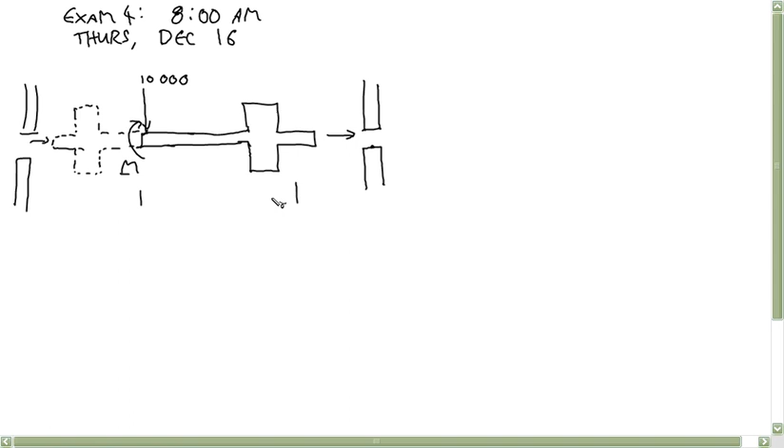So I suppose maybe I should have, do you happen to remember what this force magnitude is? Okay, so 10,000. Oh, and I didn't give a length. I guess that was so whatever this length is, make m equal to 10,000 L, and then you don't have to worry about that rotation.

But it's the same thing as this happening in two places, and there being a 10,000 Newton force split between the two of them. So what you have here is you have this force, you also have this force, right?

The force being applied axially is causing end-bearing friction. This collar here presses up against this wall, okay? And so you have to deal with that collar bearing, that end bearing pressure. And then this 10,000 Newton force causes just regular radial friction, like journal bearing friction between this point and this point. So you're just dealing with the two of those at once.

So that's all this question is, and once you follow what's going on, once you can make sense out of the geometry, it's not much calculating. It's just making sense out of what's happening that takes a little time, I think. Any other questions about that? Okay.

All right, so let's say that we have, and I suppose the most realistic applications might be the static friction questions about this, like when is motion going to start when you have this friction applied? You know, that kind of thing. Like, what's the maximum moment you can apply before this thing starts to turn? Because you don't want these things turning, you know.

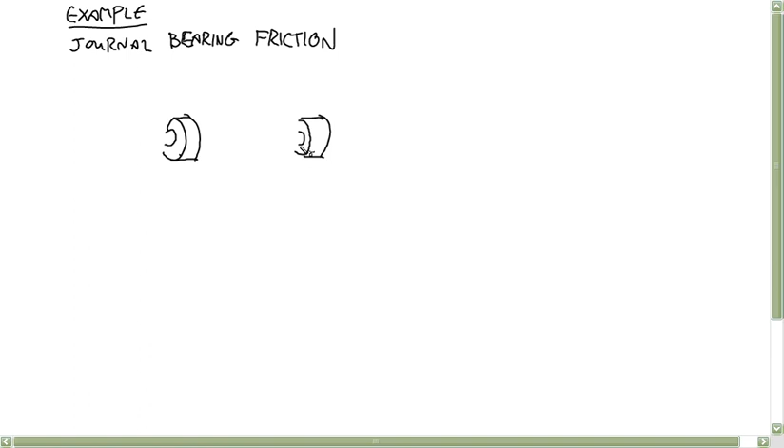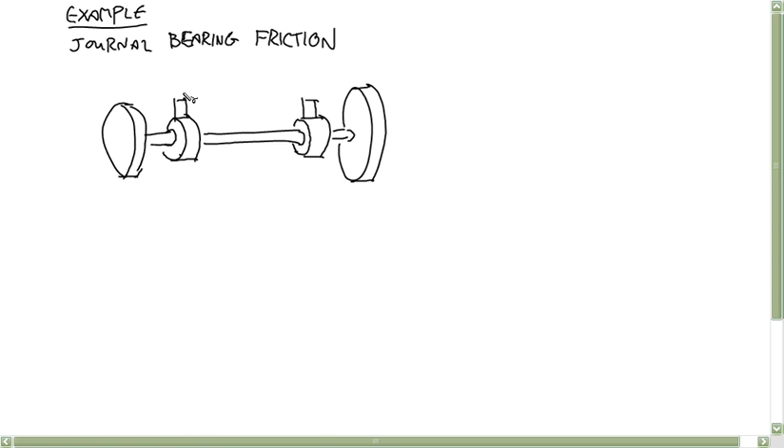Okay, so here are your two bearings. And they're connected to wheels. The axle's connected to wheels. And these two bearings are loaded 5,000 newtons each. So that represents, you know, the weight coming down from a vehicle or something.

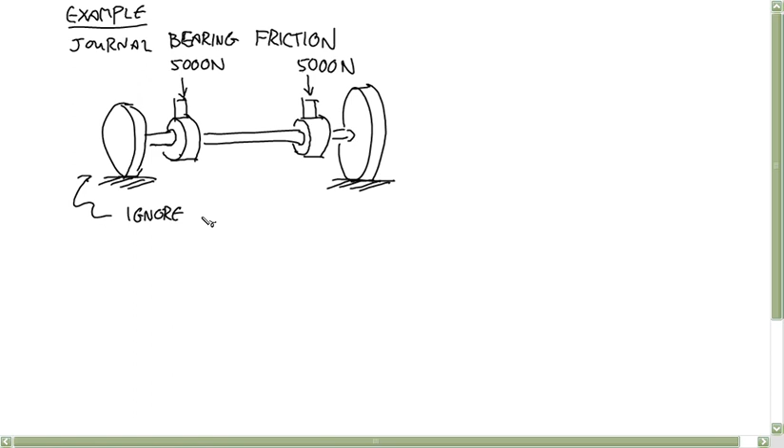We're going to ignore the rolling resistance, we haven't talked about that. But there's friction, there's also resistance acting between the ground and the wheel. How do you know that exists? Because if you remove the axle and just roll this wheel along a flat surface, it doesn't roll forever. So even in a vacuum, it doesn't roll forever, meaning there's friction between the wheel and the ground too, but we're not concerned with that here.

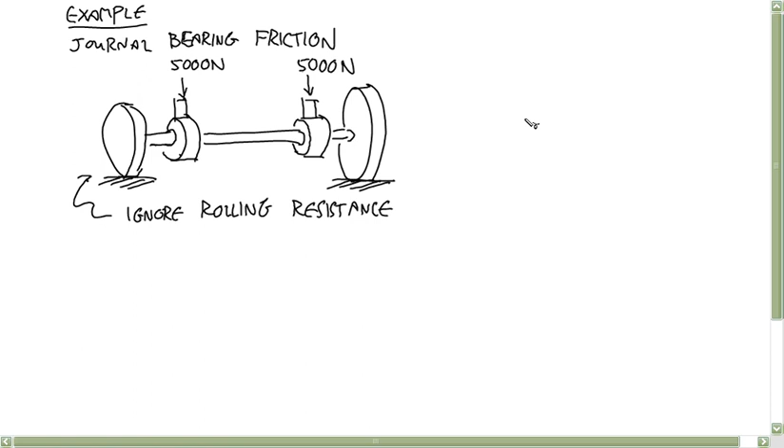The coefficient of kinetic friction is 0.2, and the radius of the axle is 5 centimeters. We want to determine the torque that has to be applied to the axle. In this case, the axle is connected to the wheels, so this torque can be applied to any part of that solid thing, to keep the axle rotating with a constant angular velocity.

We'll start with a free body diagram of the axle. What loads are acting on the axle? There's a 5,000 Newton force coming down, and there's this moment that we're trying to calculate. I didn't specify a direction, so let's give this a positive orientation, and the sign will come out for itself.

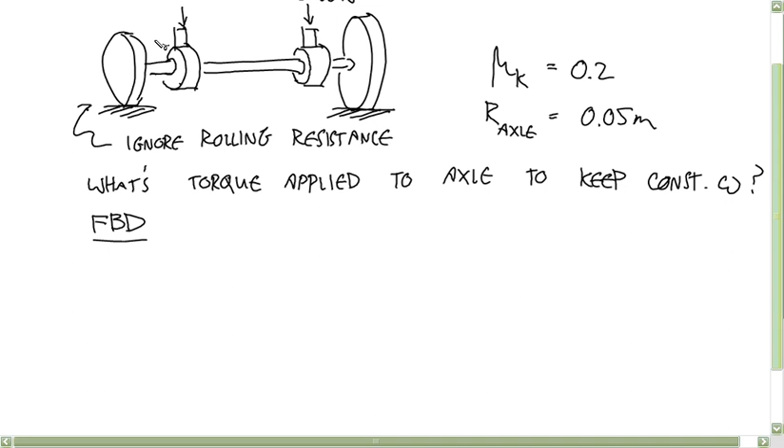You know what's funny about this? This one's actually a little bit different. In order for this to balance, we have a normal force coming up from the ground, right, and that's connected to the axle. So really here we have our force of 5,000 newtons acting this way.

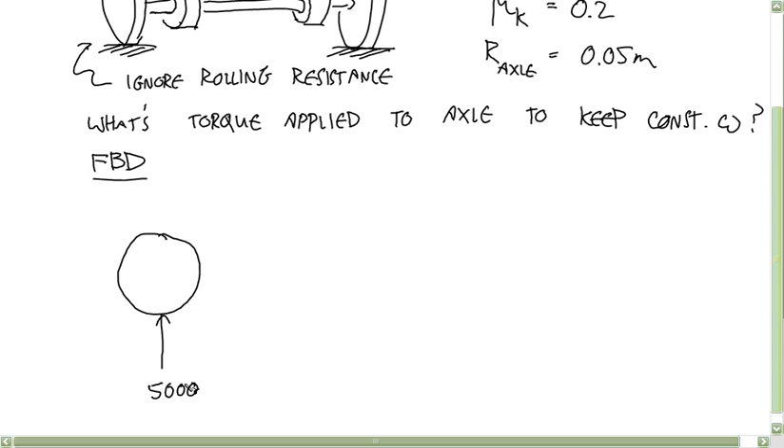We know there's going to be this external torque M applied to keep this rotating. The only other thing applying a load to this axle is the bearing, which means it has to balance that 5,000 Newton force if this is going to be rolling along a horizontal surface. Since that's the only other load applied, it can't act right through the center, or this moment would have nothing balancing it. So the 5,000 Newton force acting from the axle has to be offset — if this external moment is making it counterclockwise, this force has to be offset this way to counteract it.

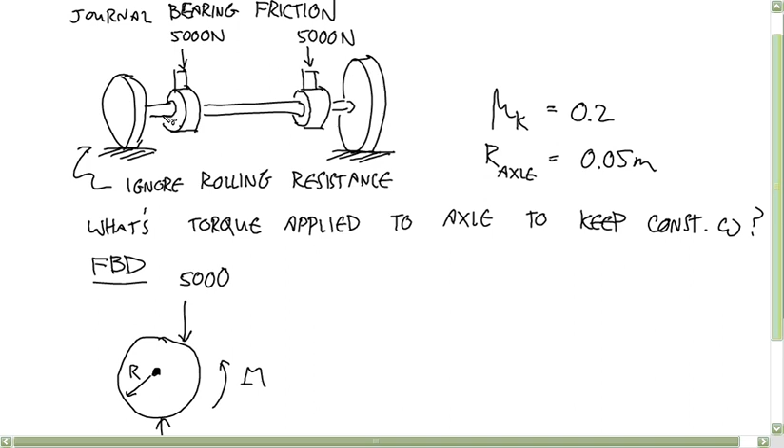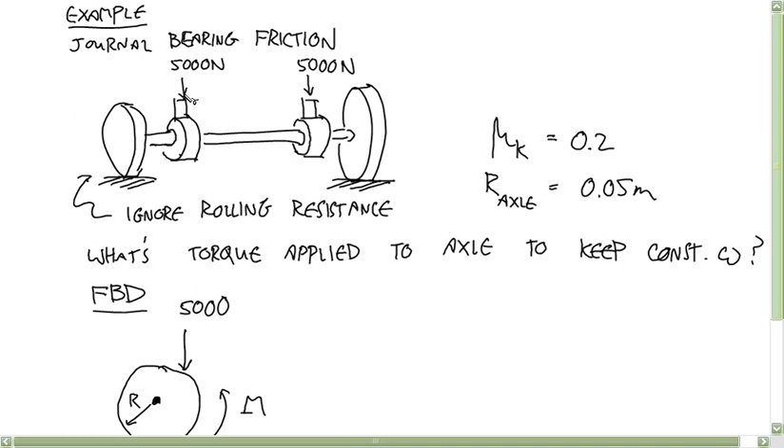Who's with me on why I turned this upside down? The force that's directly applied to the axle is coming from the wheels — the wheels and the axle are all one piece. So there's this upward 5,000 Newton force applied from the ground to the wheel, through the metal, next to it, until we get to our cross section, and then we have this upward force of 5,000 newtons. The bearing is what's pushing down in this case. And if the moment is acting this way, the external moment, that means this is the direction of rotation.

This 5,000 Newton force acting down, produced by the bearing, can be broken up into a normal force and a friction force. The normal force is this. The friction force has to counteract the direction of motion, so there's the friction force. And this friction force has to be equal to 0.2 times the normal force.

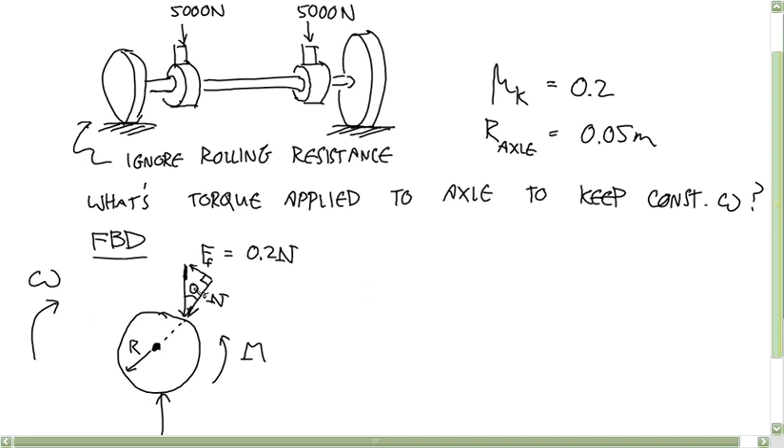Now we can use this relationship to figure out what this angle is. If this is the angle, the tangent of that angle is equal to opposite over adjacent, 0.2n over n, so 0.2. So if we make a triangle with the opposite side 0.2 and the adjacent side 1, then the length of the hypotenuse is the square root of 1 squared plus 0.2 squared, so square root of 1.04, which gives you about 1.02.

We could also calculate that angle, but there's no need to here. So once we have this triangle, what are we trying to calculate?

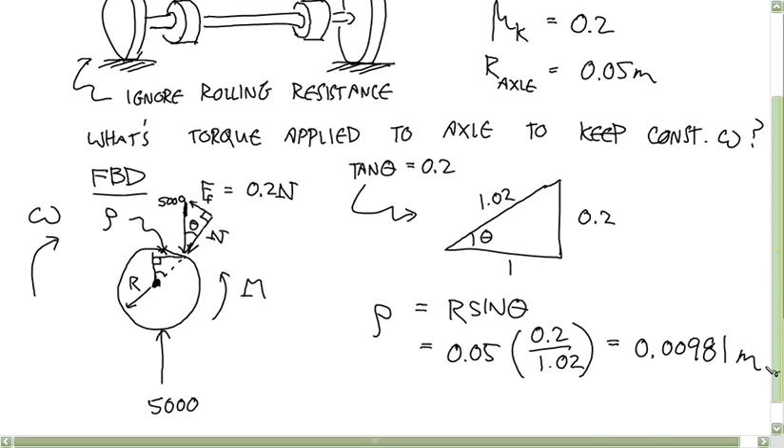So that's the torque produced by the contact with the bearing. And the only torques acting on the axle are that torque we just calculated and this external applied torque, which is equal and opposite in direction.

So m is 0.00981... no, multiply those out. M is 5,000 times the moment arm, and you get 49.05 Newton meters.

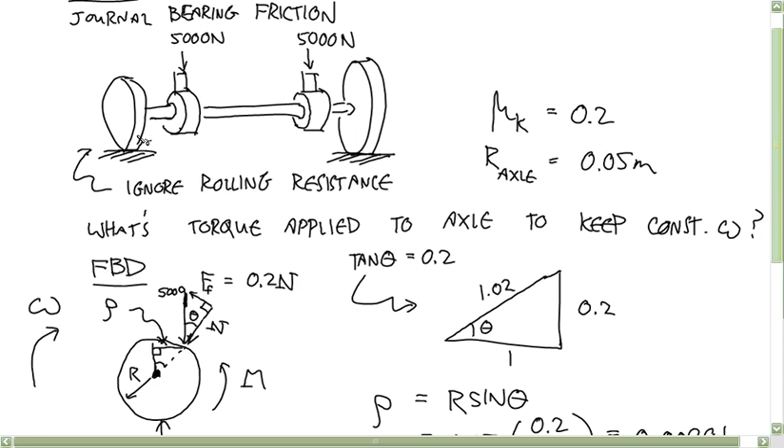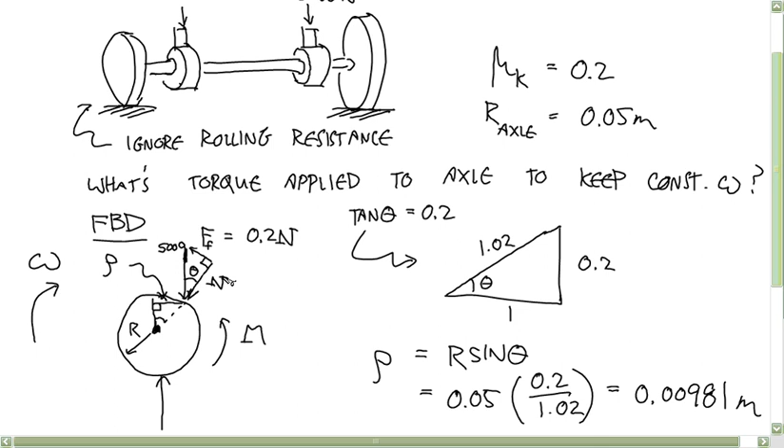This is the level of work I want to see on this, the level of derivation. I want to see a free body diagram with the normal force and the friction force drawn in. You're going to have to do some trigonometry—it's fine if you just use the inverse tangent to get that angle and then work from the angle for the moment arm.

That number is with my... I think I just had 1.0198 instead of 1.02, and that's how I got slightly different answers. Okay, any questions about that? All right.

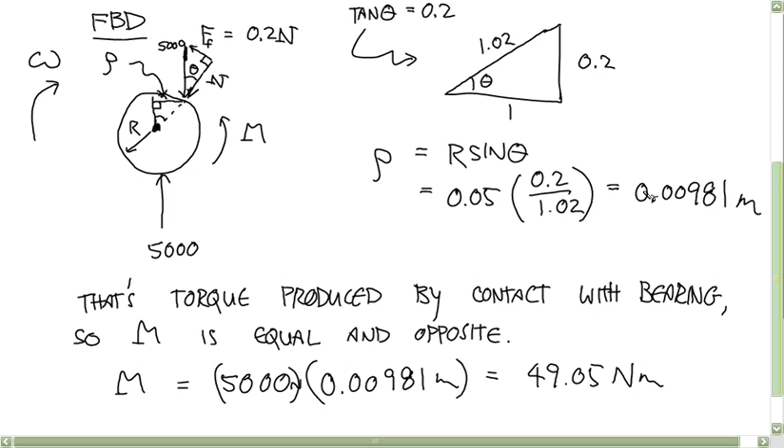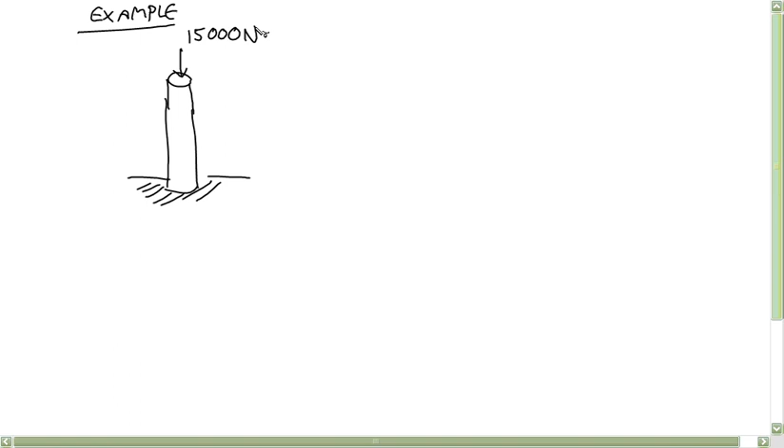That was my warm-up. This one's going to be clear. So now let's do an example of end-bearing friction. Say that you have this cylindrical shape in contact with the ground. You have a 15,000 Newton force acting down on it, pushing these two surfaces together.

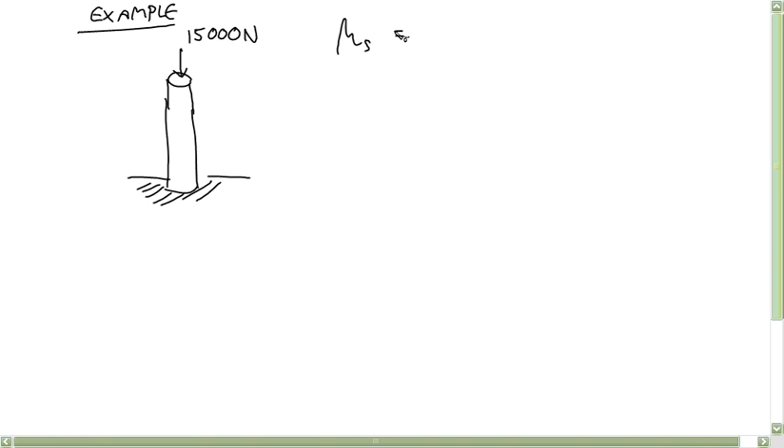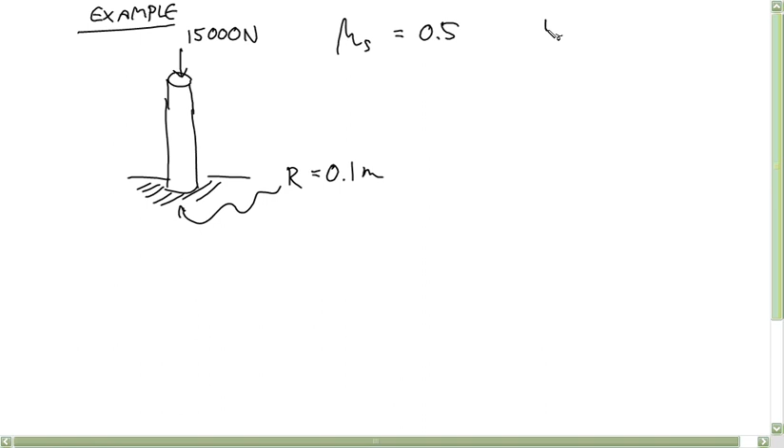Say the coefficient of static friction between these two surfaces is 0.5, and the radius of this cylinder is 0.1 meters. The question is, what's the maximum torque that you can apply before this starts to turn?

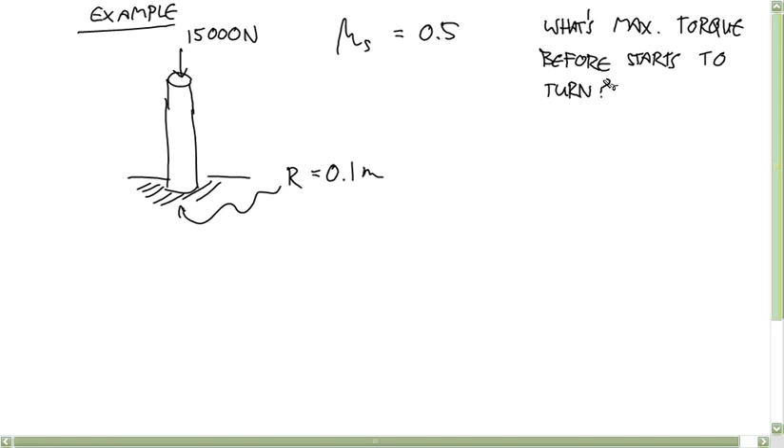For these problems, I want to see you go through the integral derivation. They're always going to be cylindrical shapes, so it's going to be very similar each time, but I just want you to get used to using this way of thinking about the problem.

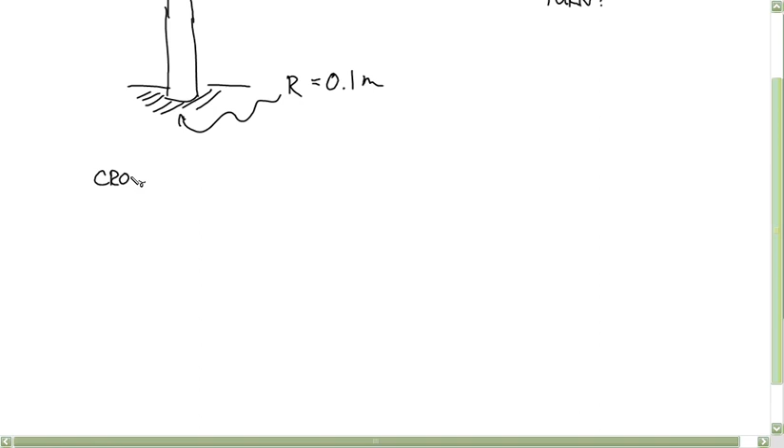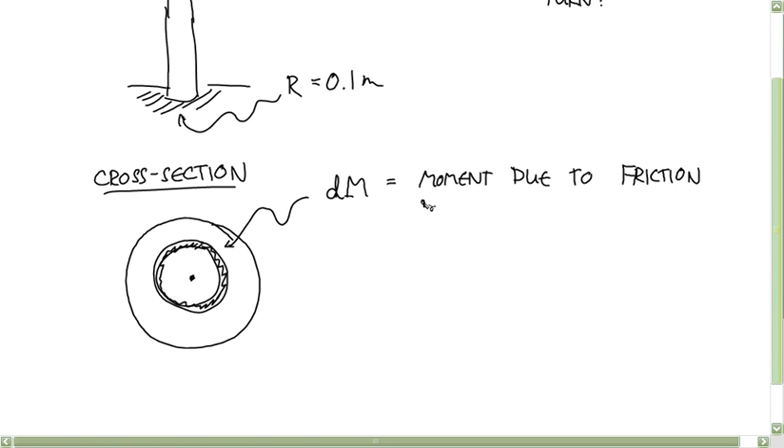So in cross section, we want to figure out, for each infinitesimal ring around the center, the increment of torque that friction is producing—that's the moment due to friction of this infinitesimal ring.

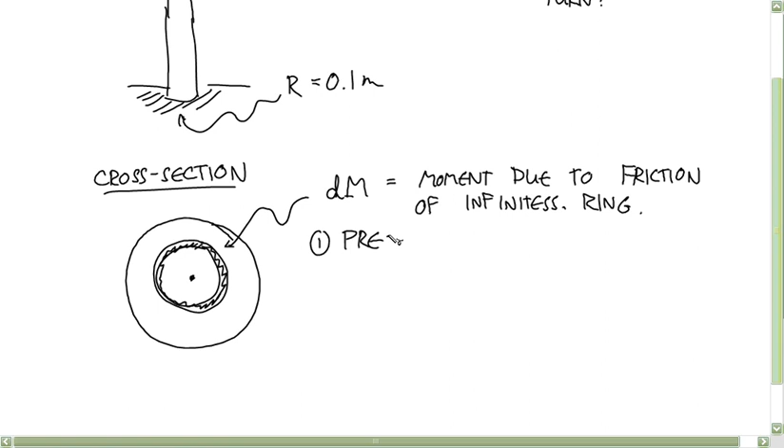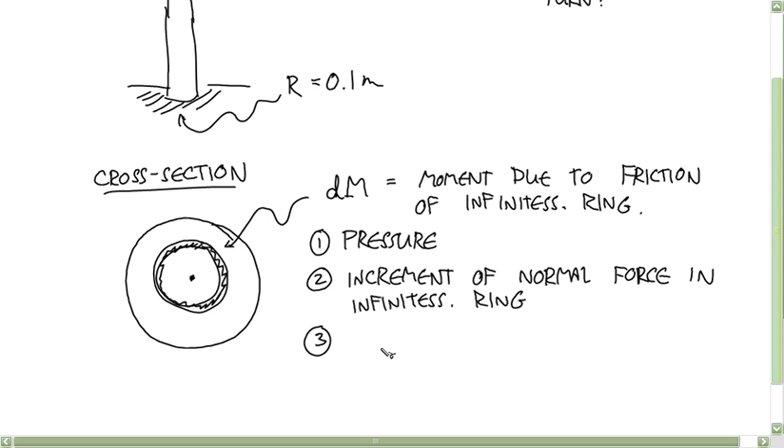So to do this, we're going to figure out the pressure over this whole surface. Then we're going to figure out the increment of normal force in this infinitesimal ring. From that, we're going to figure out the increment of the friction force in the infinitesimal ring.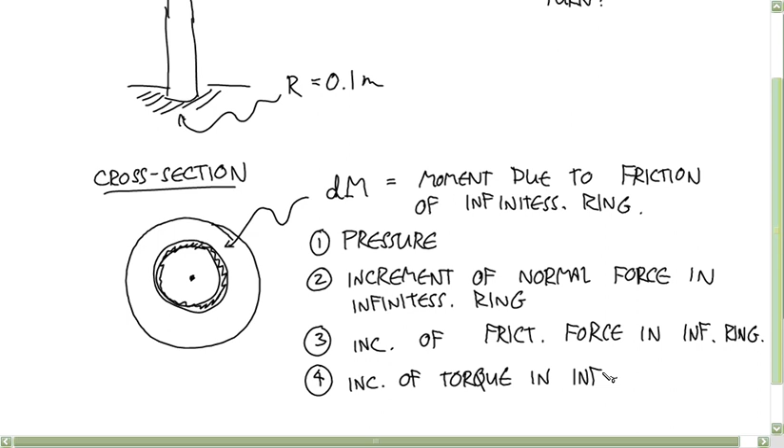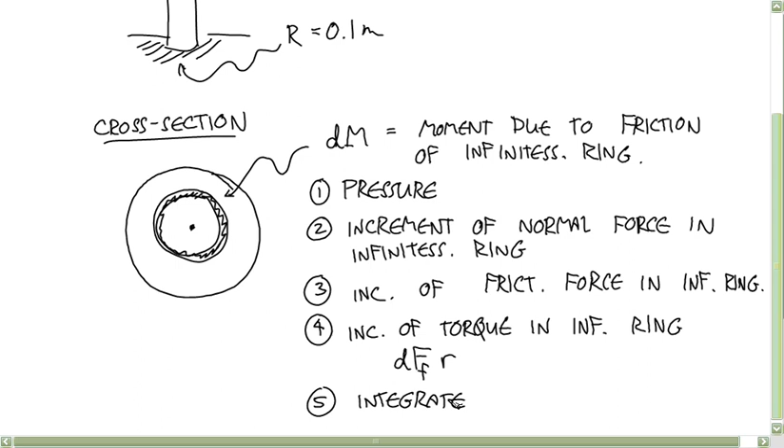Then we're going to figure out the increment of torque in the infinitesimal ring—that's d force of friction times the distance from the center to that infinitesimal ring. And then finally, we're going to integrate to get the total moment due to friction.

All right, so the first step is to figure out the pressure. The pressure is just the total normal force divided by the area. So we have 15,000 newtons divided by the area of that whole cross section, which is pi r squared.

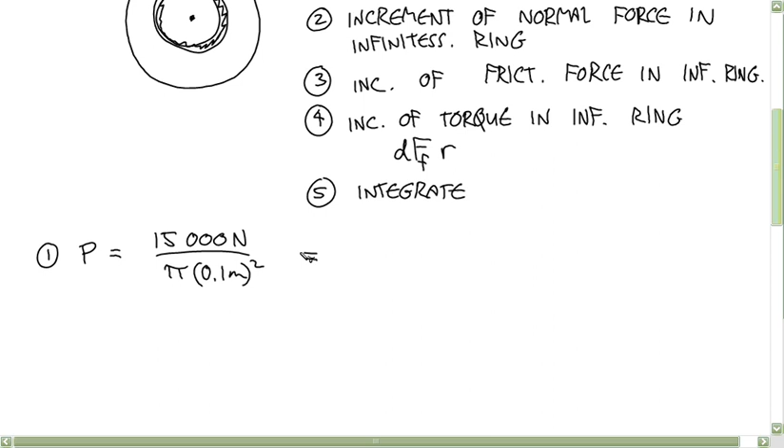And you get 477,465 pascals.

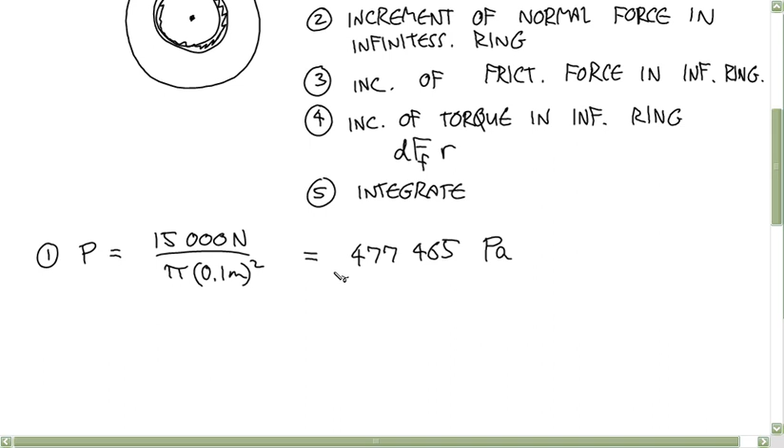And now we're going to use this fact. This is a force per area, right? We're going to come up with an expression for the incremental area of this ring.

So if we're looking at this ring, its area is the circumference times the thickness, okay? The thickness is our increment dr. This is the distance r. So we have 2 pi r dr for the increment in area.

The increment in normal force then is equal to the pressure times the increment in area. So 477,465 times 2 pi times r dr, and you get 3.000 times 10 to the 6th times r dr.

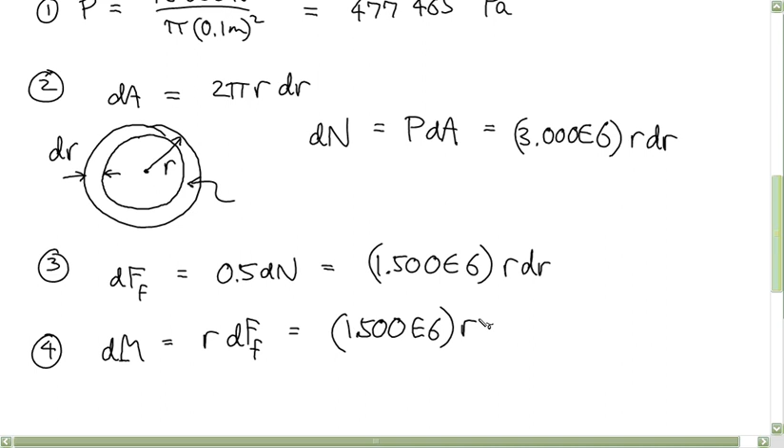Now the increment in the moment is r times the increment in the friction force. So that's 1.5 times 10 to the 6th r squared dr.

Step 5, now we just integrate this. We have everything expressed in terms of the variable r. So we're going to integrate 1.5 times 10 to the 6th r squared dr. And what are the boundaries of the integral? Yep, 0 to big R.

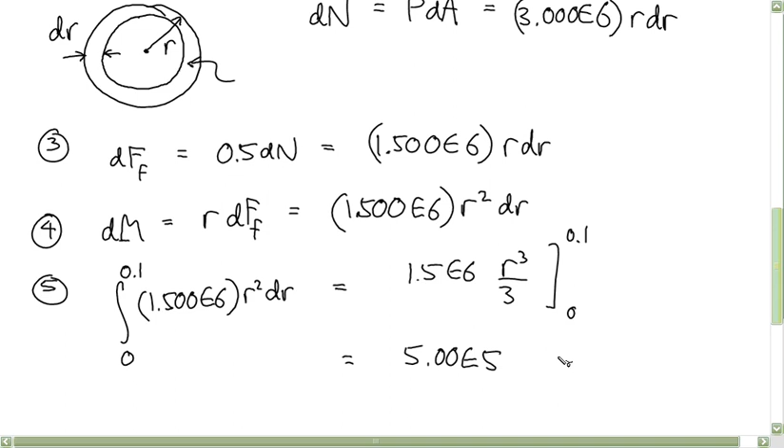So that's 1.5 times 10 to the 6th times r to the 3rd over 3, evaluated from 0 to 0.1. So that's 5 times 10 to the 5th times 0.1 to the 3rd. And you get 500 newton meters.

Anyone have any questions about that one? Okay.

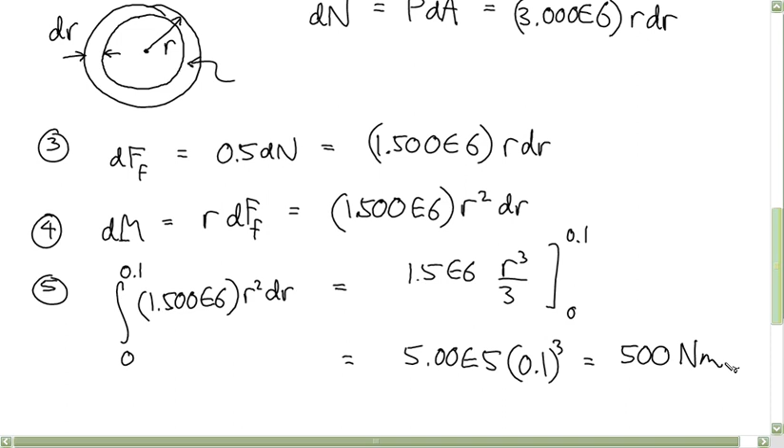So the last topic we're going to go into is virtual work. We're not going to get this to a point in this class where this really becomes a good alternative to the methods we've already done, but we will talk about it enough that you can see the potential for it. I'm bringing this up because this is an introduction to energy methods.

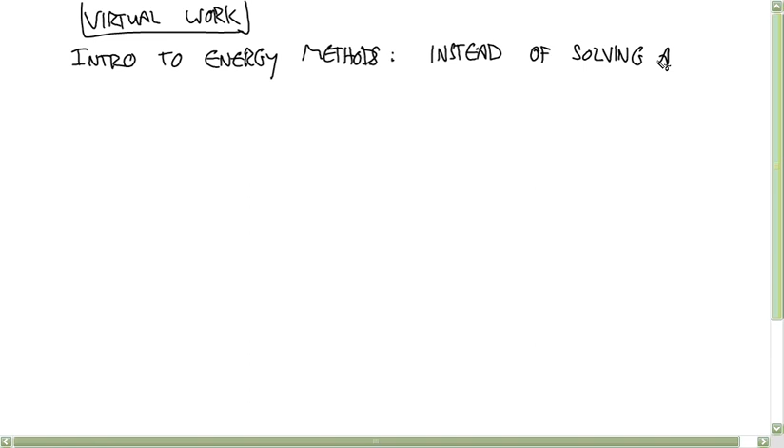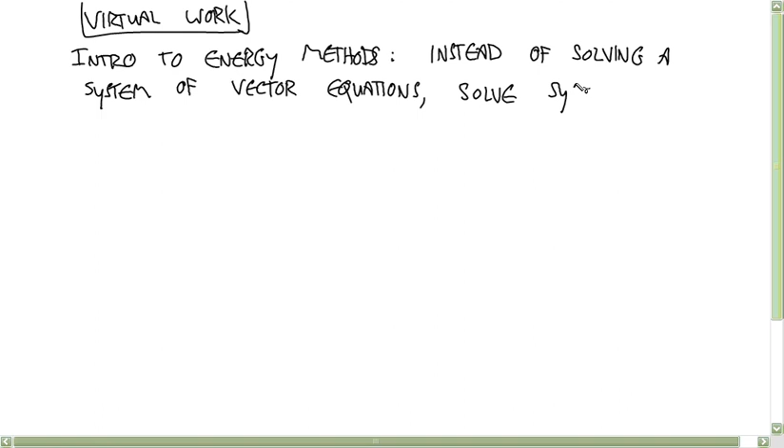One of the benefits of energy methods is that instead of solving a system of vector equations, you solve a system of scalar equations. And worrying about vector directions and stuff can be a little tedious, but that's not really the main benefit of this.

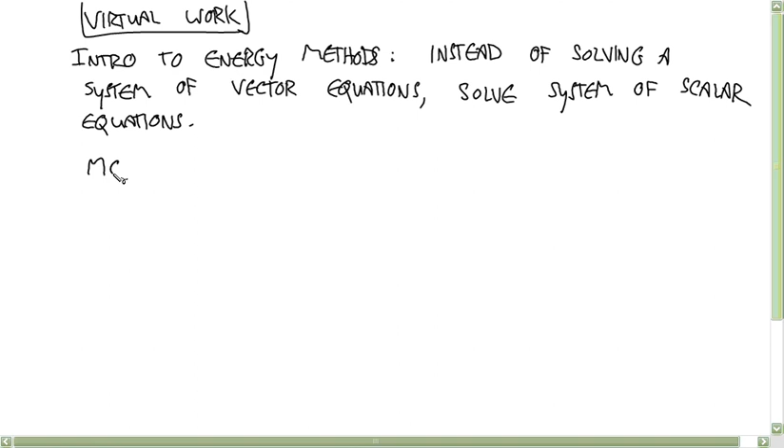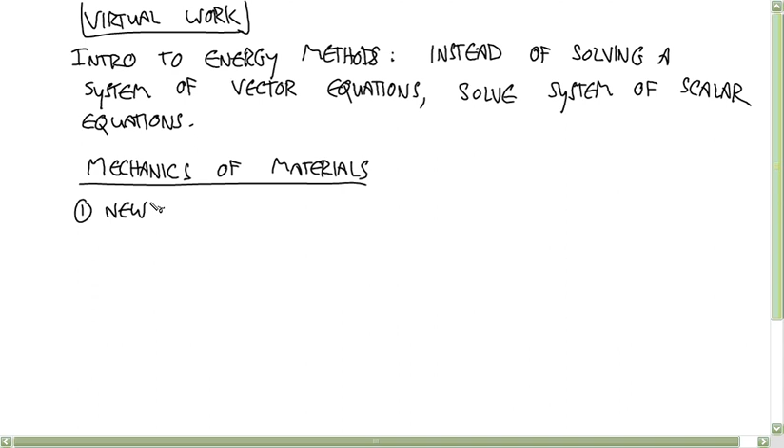On my dissertation project, the problems that I solved, I did all using an energy method. And maybe the most practical application of an energy method that anyone who goes into a mechanical branch of engineering ends up dealing with is finite element analysis. So the equations that go into finite elements, really the main numerical method for solving mechanics problems, are all formulated in terms of energy. In order to understand finite elements, you have to understand the idea of these energy methods.

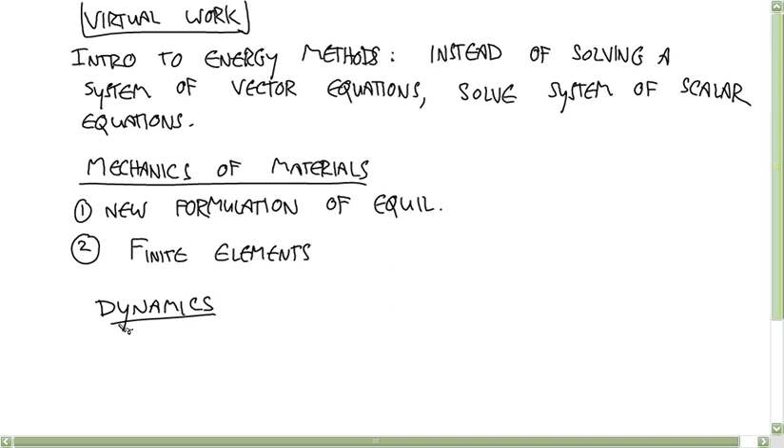And in dynamics, the other big branch that comes out of statics, comes Lagrangian dynamics. Lagrangian dynamics is really useful for linkages, dynamics of linkages. Linkages are just collections of rigid bodies that meet at joints, like our structures, except they're moving, and you have to calculate acceleration and velocities. And it also lends itself really nicely to computer programs, so it's the approach to dynamics that's used in dynamic software packages. It's good for programming.

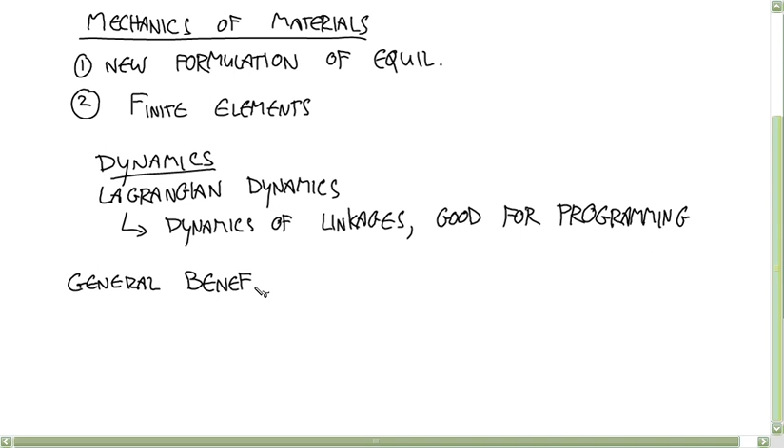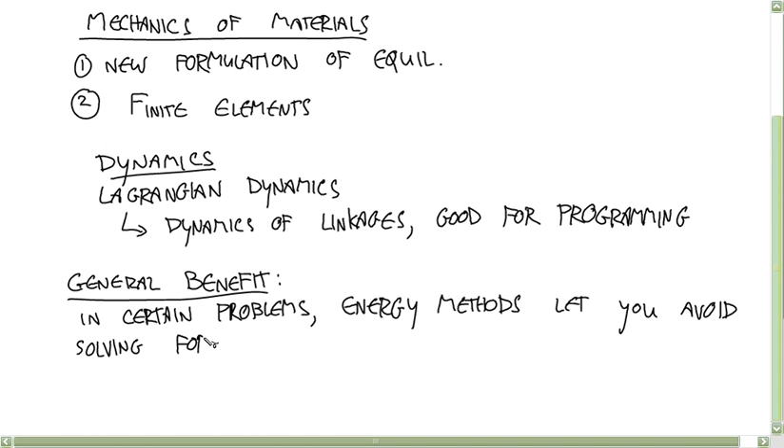Okay, so here is really the general benefit: in certain problems, energy methods let you avoid solving for quantities you don't care about.

And here's an example of how that doesn't happen in the methods that we've been talking about, Newtonian methods.

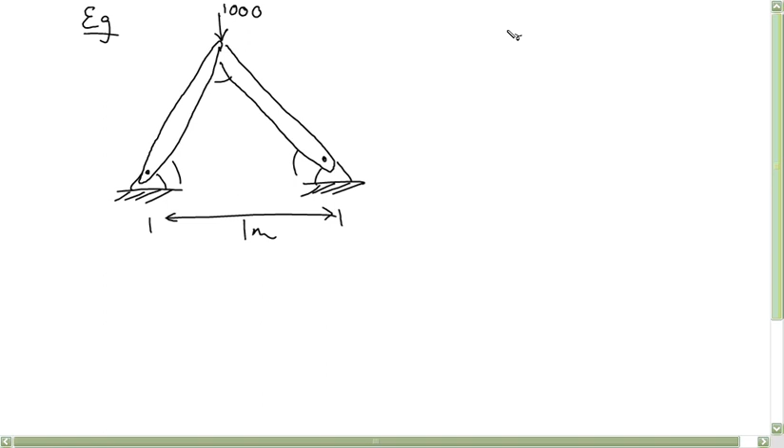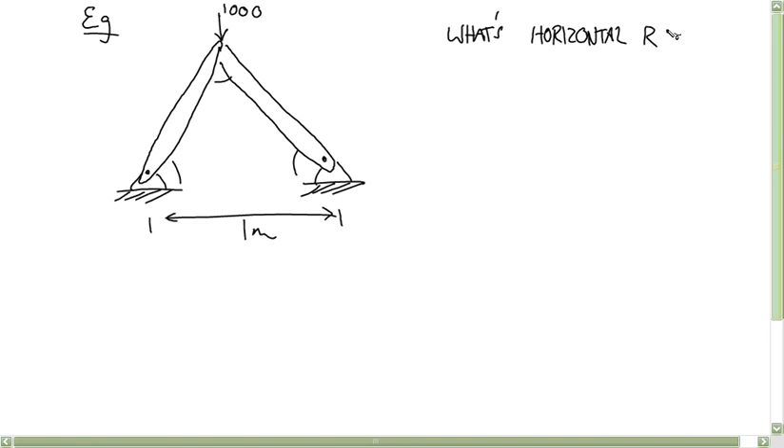So say that you want to analyze a structure like this. We've dealt with structures like this a million times. There's a 1,000 Newton force acting down. This distance is 1 meter. All these angles are the same. And say that what you want to find is just the horizontal reaction force, the horizontal component of the reaction at B.

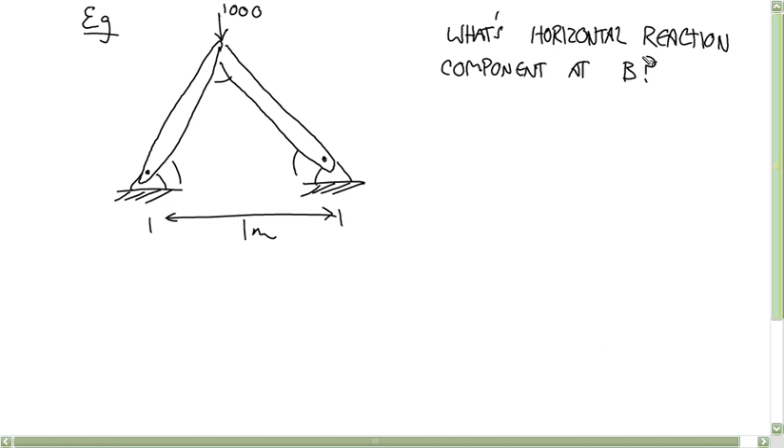Okay, so I'm not gonna go through this problem, but let's just think about what would be entailed. So first, we draw a free body diagram of the whole body. We have the 1,000 there. We have the components of the force FB here, the components of FA, right? We have 4 unknowns then. We only get 3 equations from this free body diagram.

So we have to move on to one of the members. Say you isolate this one then. You have the 1,000 Newton force. You have the reaction force between the 2 members, F12. You still have FA. Now you can solve it, okay?

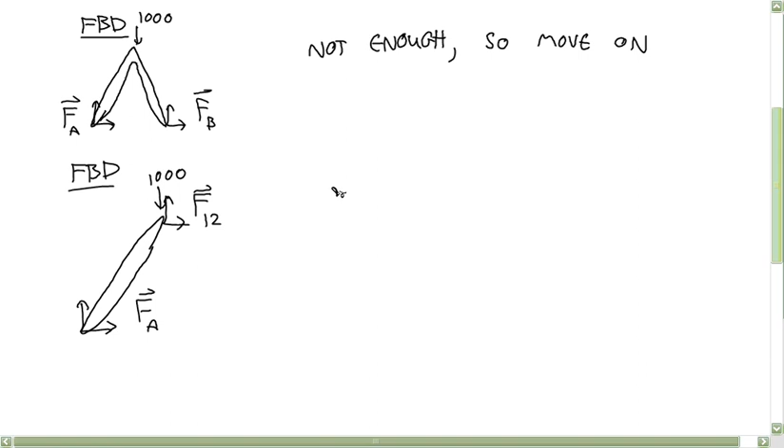But in the process, you had to solve for all these things that you didn't want in the first place, right? You had to also solve for F12, FA, and the component FBY. And all we wanted was FBX, okay?

And I'll do this example after I present a method for virtual work. And we'll see that we end up being able to bypass all that other stuff we don't want and just focus on the one variable that we're interested in, okay? So in some cases, and this is one of those cases, you get what you want without taking as much computing power - that's the benefit in a computer program.

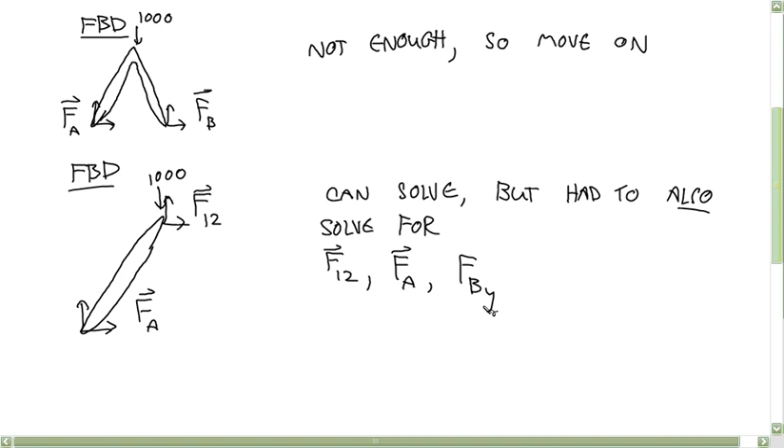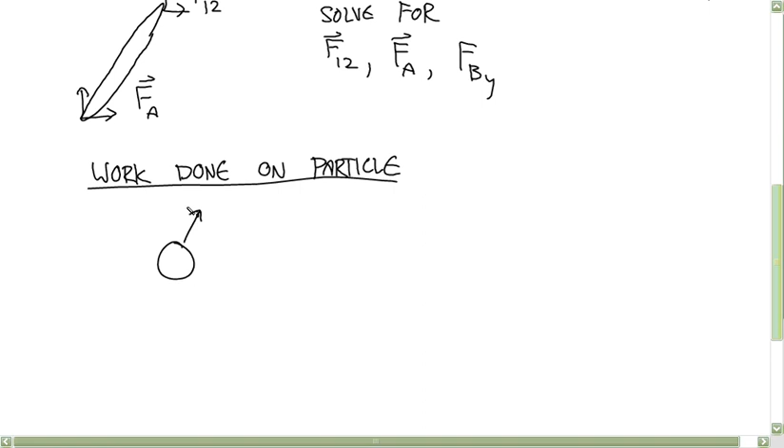Okay. So in order to introduce this method, first think of work done on a particle. If you have a force F applied while a particle goes from this point A to B, right?

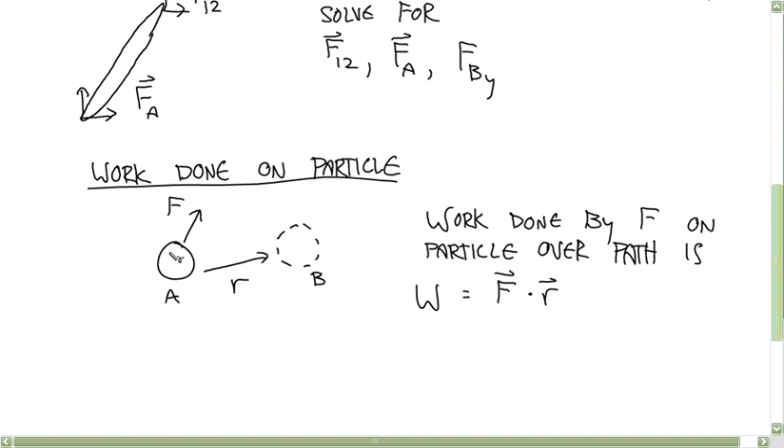And I'll call this the R vector. Then the work done by F on the particle, over that path, is work equals F dotted with R, right? So if the force and the motion are perpendicular, then there's no work done, right?

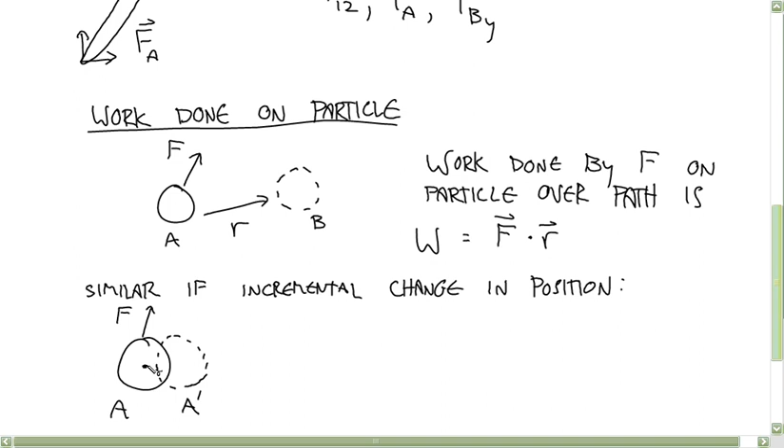It's similar if we just look at some incremental change in location, okay? We're just dealing with an increment dr instead of a vector r. So incremental change in position. Say we're going from a point A to a nearby point, A prime, under the influence of this force F. Now this increment is dr.

And we'll say that the increment of work done by F over the path dr is du. So we're going to use u instead of w. Keep your eye on the ball, though. It is the force dotted with the increment dr.

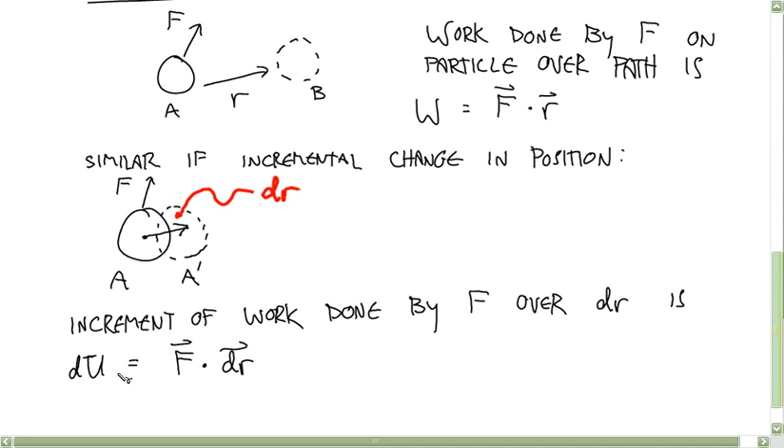Okay. And if you wanted to, so then if this force was changing as this path moved around, you could integrate this, solve this as a line integral, right? And that's a way to calculate work if you don't have a constant value of the force. Remember doing that? Did you do that in 1121? Oh, okay, okay. So, well, you can do that. It's not that hard.

So what if you're not dealing with a particle, you're dealing with a collection of particles? Because that's what we care about, right? I mean, we care about mostly particles collected into rigid bodies. So what about a collection of particles?

Well, oh sorry, skip that for a second. So I want to say one more thing about this back here. So this is kind of the key to this idea, this chapter. So what if that particle is in equilibrium? Okay. Well, if it's in equilibrium, the total force acting on the particle has to add up to 0, right?

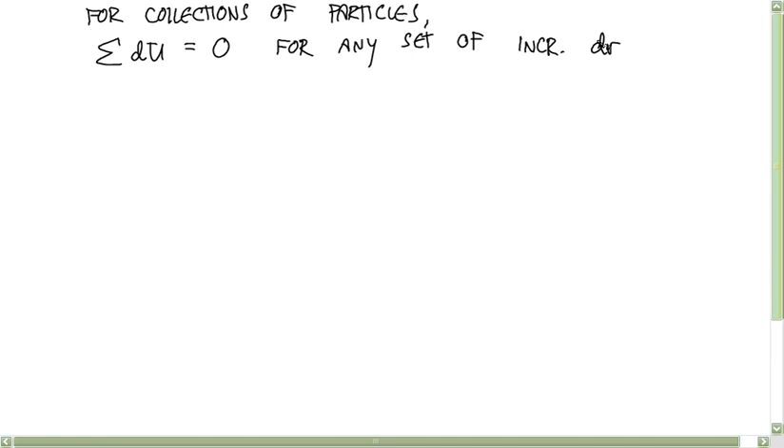Okay, so now for collections of objects, collections of particles, since that's true for one particle, it has to be true that you add up the increments in energy for all the different particles, and they're equal to 0, right? For any set of increments dr, if the collection is in equilibrium.

That wouldn't be too useful except for a couple of cases where the incremental work is equal to 0, okay? And that's going to let us simplify this a lot. So this wouldn't be too useful except for 3 simplifications.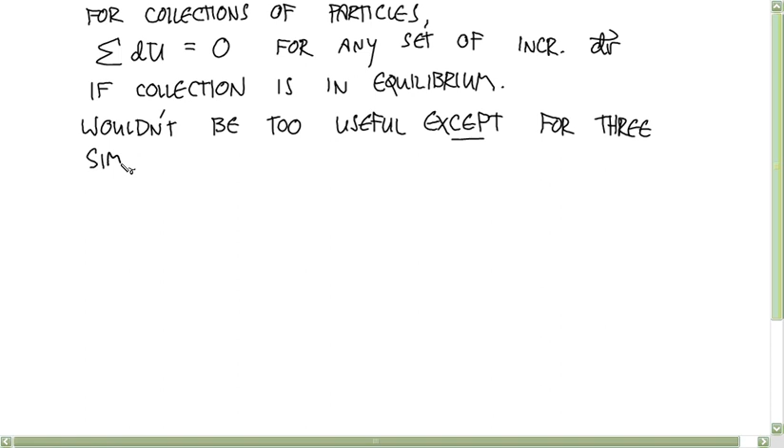The first one is consider the work done by forces between particles that are part of the same rigid body.

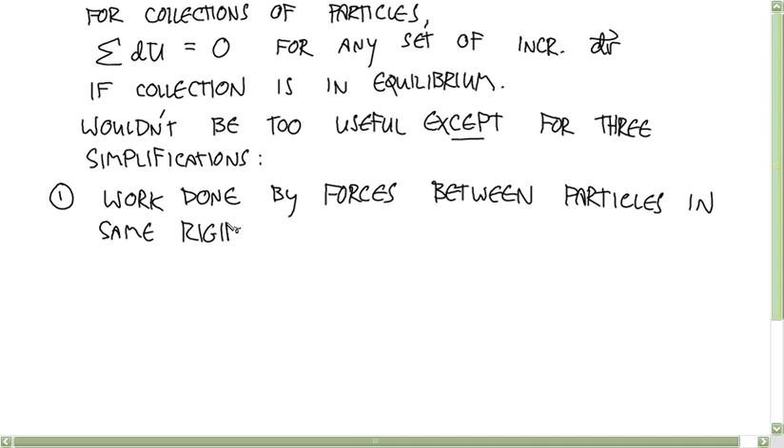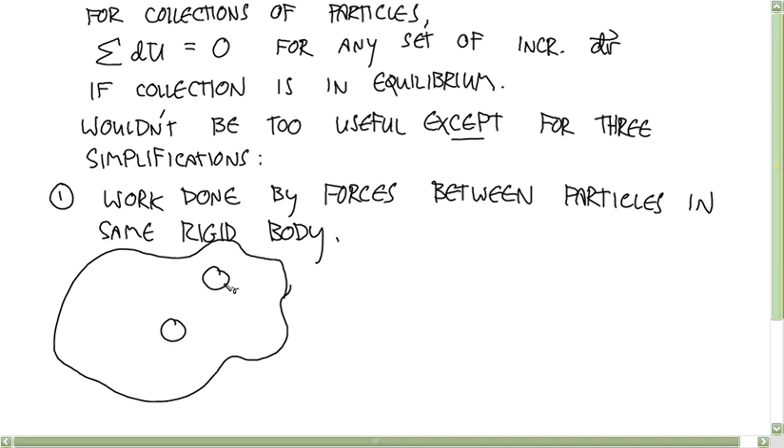So these two things are fixed relative to each other, right? This overall body can be accelerating around, it can be rotating, okay? But the distance between these can't change, right? And the net force between these two particles has to be in line between the two particles. And they can't change distance, right? You can think of that as a definition of a rigid body.

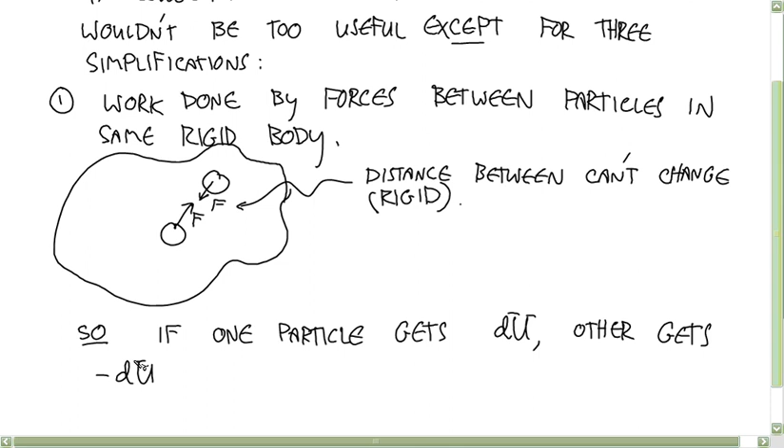So, if one particle gets an increment in work du, the other gets negative du, right? If one moves to the left, the other one also moves to the left, right? The forces are equal and opposite. You know what I mean? So when you take that dot product, those works are equal and opposite.

So the long and the short of it is you can neglect any du produced as an internal load in a rigid body, okay? So if you're looking at a system of particles organized into a rigid body, you're still going to have to worry about the increments in work done by external forces, okay? But you're not going to have to worry about any of the stuff happening inside, because they come in pairs that are equal and opposite, and they add to zero, okay? You know what I mean? Like that.

So we said up here that for a collection of particles, for something to be in equilibrium, all of these virtual works have to add up to zero, right? So think of the virtual work done on this pen right now, okay. So it's not really a pen, but there's one force coming from my hand, right, and there's a million forces between the things in the rigid body, okay. So it would be really bad to have to add all those up. But this says all of those produce work in equal and opposite pairs, and so we can forget about that and only worry about the work done by my hand as we move this thing around in these little infinitesimal motions, okay? So that's really good. That's the most important of these three.

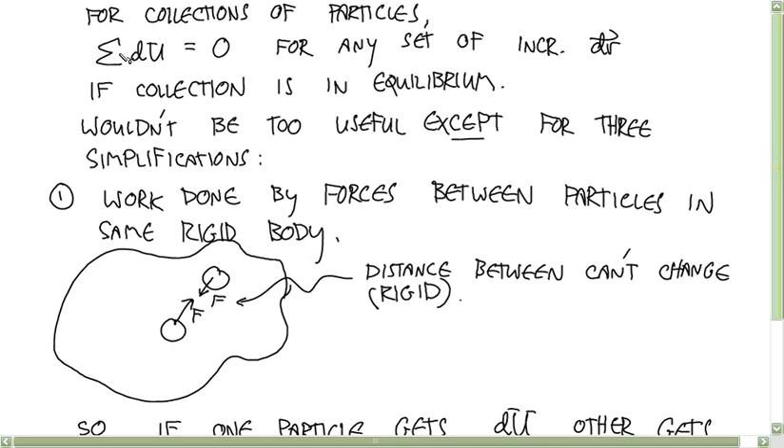The second simplification has to do with the forces applied at frictionless pins. Okay, so if you have a linkage, a structure, and there's a pin here, we know that Newton's third law says if you have a force vector here, then over here you have a vector negative F, right? And these two forces are both acting on a particle at the same spot, the middle, right? And that middle, that one thing, obviously has the same dr no matter where you're moving this, right?

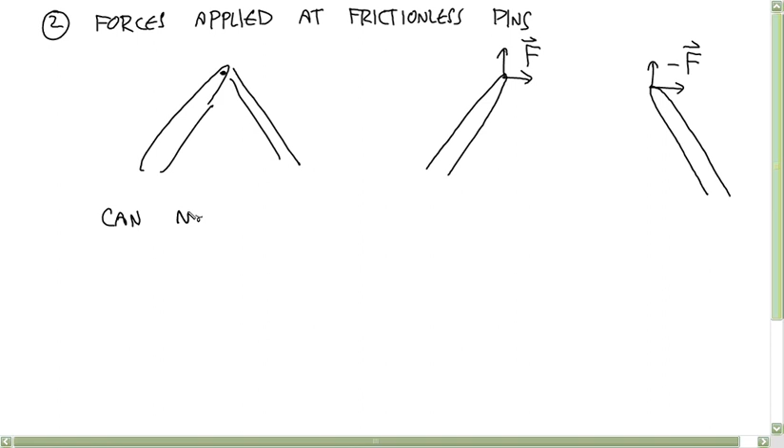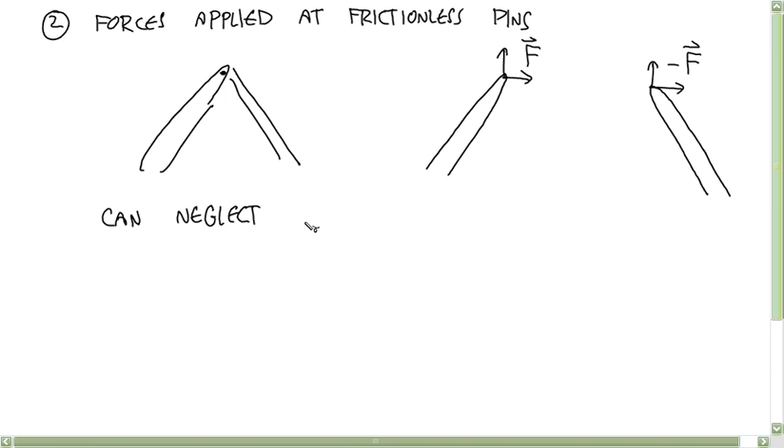It's the same point. And so one gives you a positive work of 10, the other one gives you a negative work of 10. And so you can throw those out, you know? Anytime you come up with this matched pair of equal and opposite works, you can throw that out and not worry about it, okay? So not only can you neglect all forces between parts of a rigid body, forces internal to a single rigid body, but you can neglect forces between rigid bodies at frictionless pins.

And that's really the thing that makes this so useful for linkages, is that we're not going to have to, like in a Newtonian method, calculate all these internal forces. With this energy method, we can just throw all that internal stuff away. Okay, it's not good if you want to calculate those internal things, but...

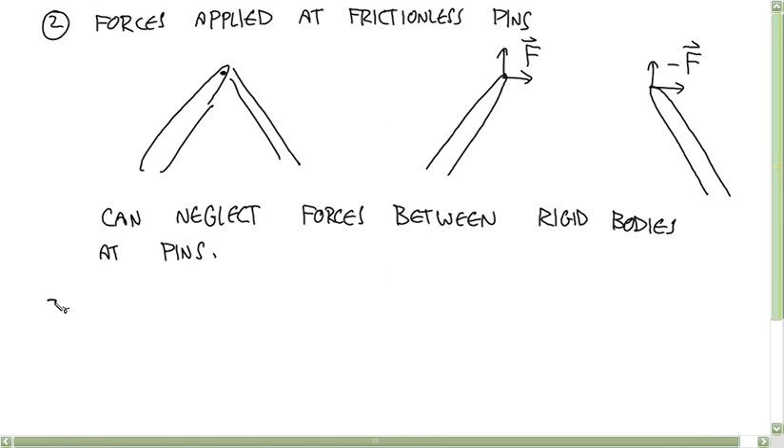And the third simplification is inextensible cables. And the reasoning is the same. Say you have these two objects connected by a cable. Since the cable is inextensible, if this moves in the direction of its cable tension force, then this one has to move opposite the direction of its cable tension force, and those have to be equal in magnitude.

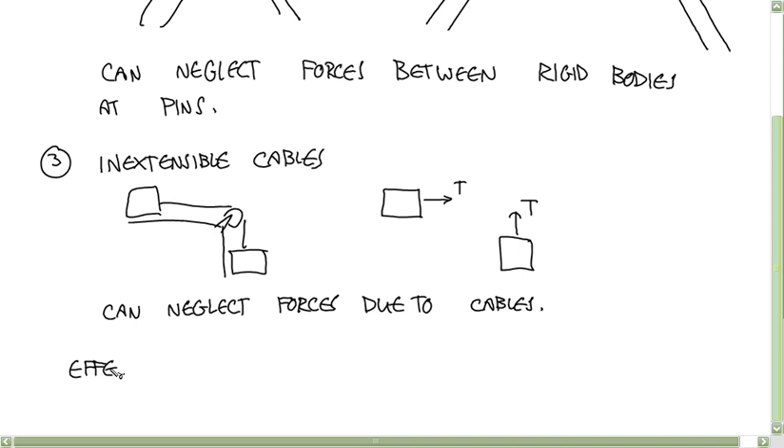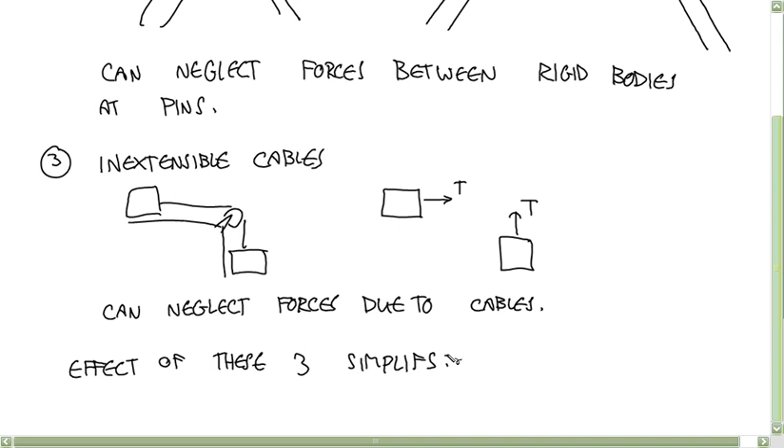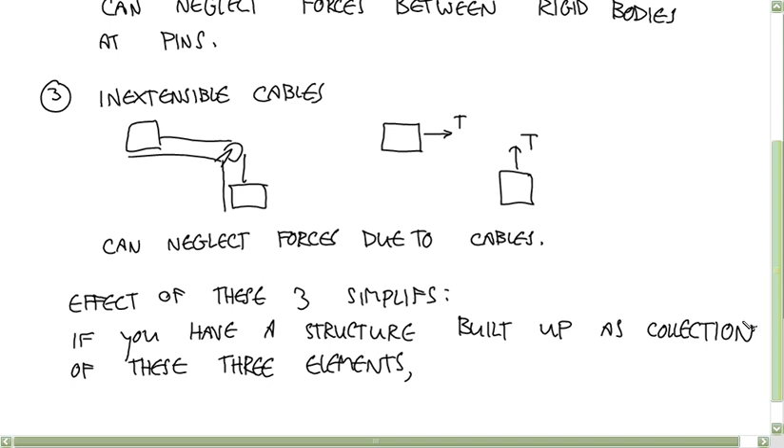So, the effect of these three is: if you have a structure that's built up as a collection of these three elements—rigid bodies, pin joints, and inextensible cables—then you only have to calculate changes, increments in work, due to external forces. Okay, forces external to the structure. So that's the benefit.

And so next time I'll talk about how to treat couples, and then we'll get into a method for using this for actual problems, and we'll do that example that I put up there but didn't solve before. Any questions about any of this?